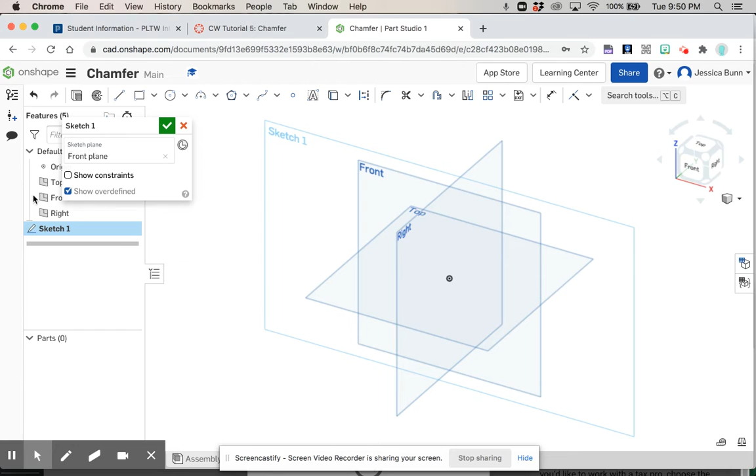We're going to start with creating a 3 by 2 by 1.5 inch rectangular prism. I'm going to start with a sketch, put it on the front view, and then draw a rectangle that I want to be 3 by 2. Then I'll finish that sketch and extrude it for a distance of 1.5.

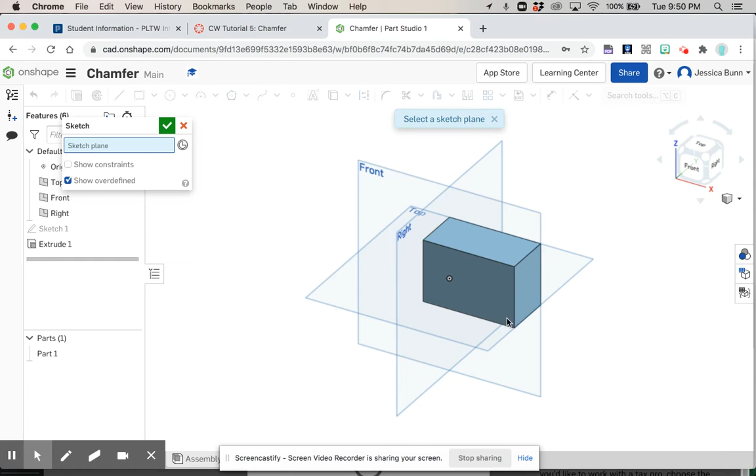I'm then going to start another sketch here on this surface with another rectangle, with dimensions 2 by 1. And then we'll need some location dimensions to place it correctly. So we want it to be 1/2 inch from the top edge to the top of the sketch, so 0.5. And then we want it to be 1/2 inch from the left edge to the left edge of our new sketch, 0.5 again there.

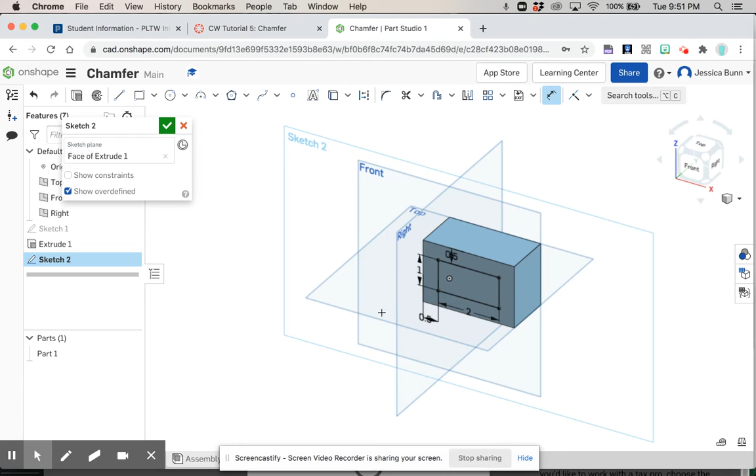We're then going to finish this sketch and extrude it out for a distance of 0.75.

Now we'll dive into the chamfers. If you look along the top, this fillet we used in the previous tutorial, we'll use chamfer today. It looks like this. If you hover, it'll tell you how to do it, and it'll also illustrate for you what to do. So I'll click there.

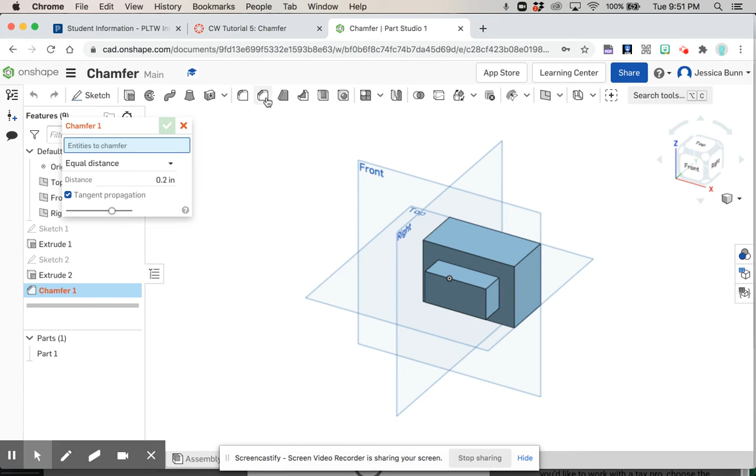I'm then going to click each bottom corner or bottom edge of that new extrusion we just created, like that. And we want our distance to be 0.25. You can click your green check.

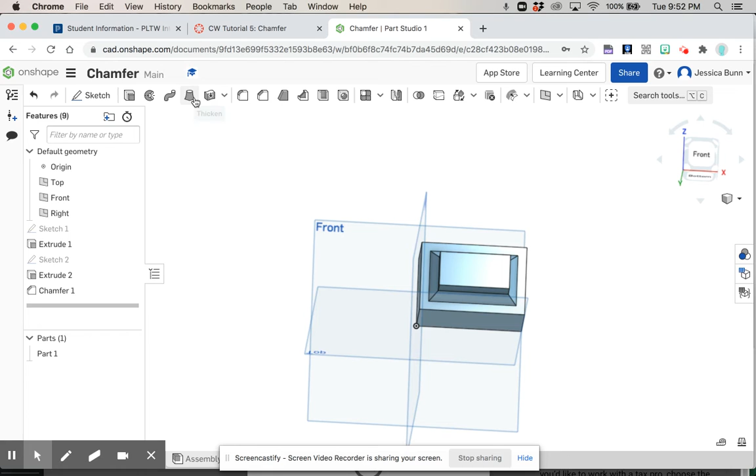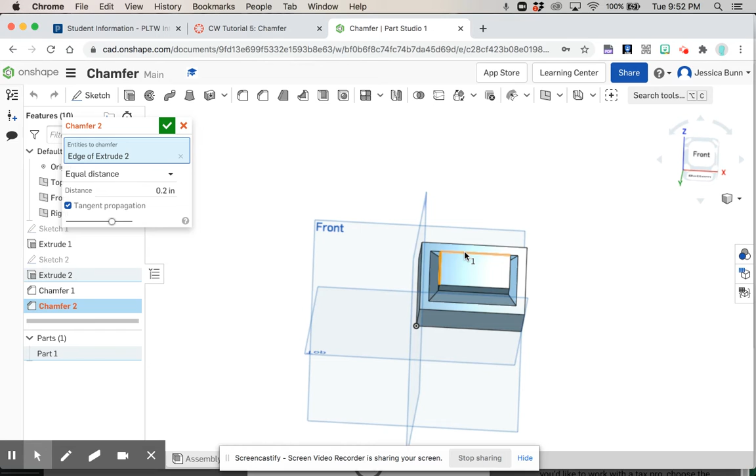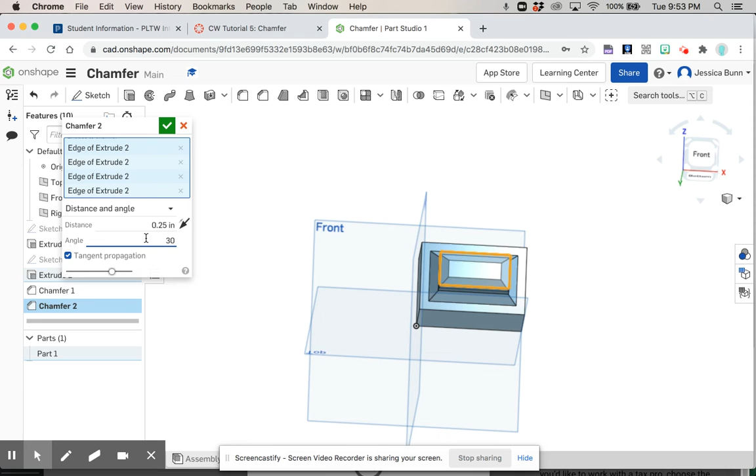I'm then going to choose chamfer again. This time, instead of just an equal distance, we're going to have a distance and an angle. We're going to select the edges along the top, and then choose a distance and an angle from our drop-down box, distance and an angle. We want the distance to be 0.25 and the angle to be 30 degrees. Then click your green check, and it should look something like this.

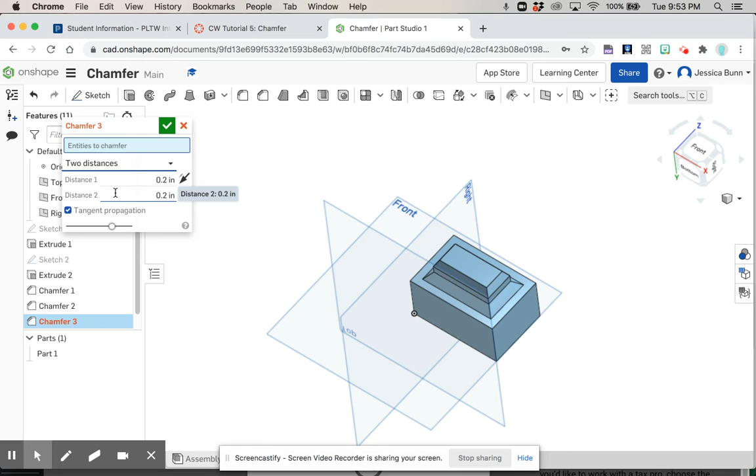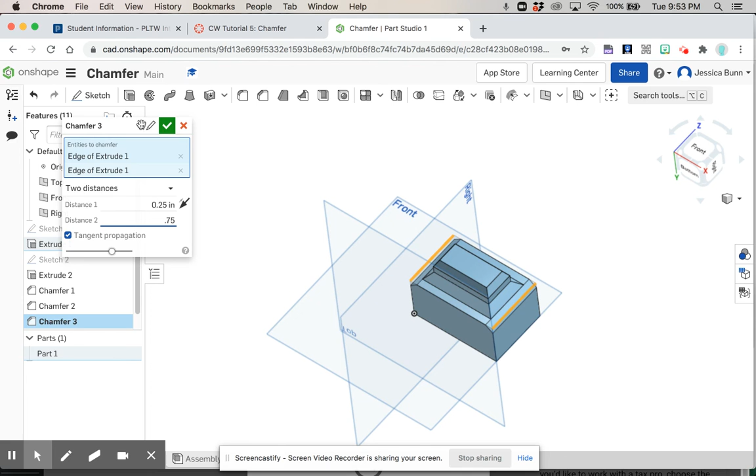We're then going to add one more chamfer, this time choosing 2 distances. We're going to select this edge and this edge here. We want distance 1 to be 0.25, and distance 2 to be 0.75. You'll then click your green check. It should look something like this, and then that's complete.

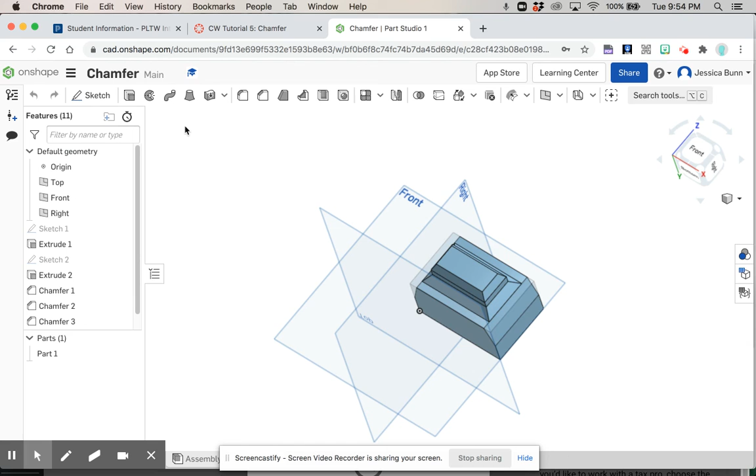If you notice that yours doesn't look like mine, you can always come back in here and edit any of the chamfers by double clicking them, making sure that you chose the correct type of chamfer. Chamfer 3 was 2 distances, chamfer 2 was a distance and an angle, and chamfer 1 was equal distance. You can then also check back and look at any of your sketches to see if you had errors there. But if you followed along, yours should be correct as well.